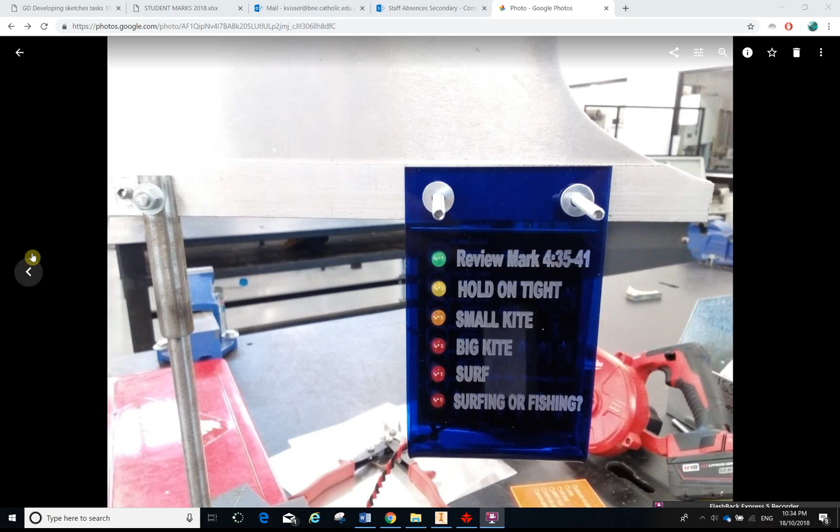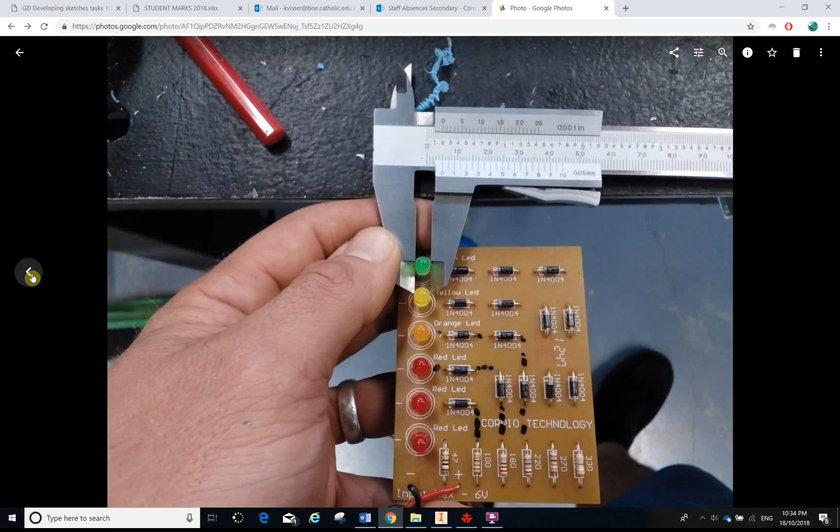So if we look at the pictures, we've got our LED lights coming through our holes that we've positioned on the board. This video will take you through how we figured that out and how to do it in Inventor.

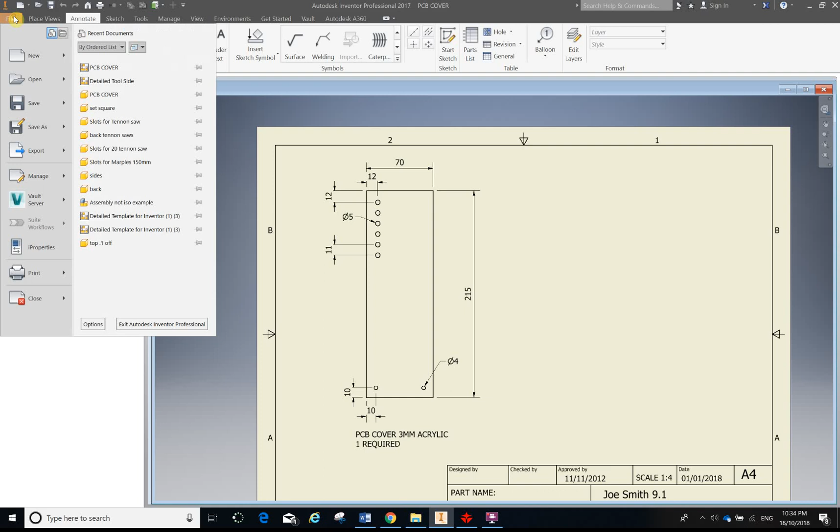So you're going to start off by going into your remote desktop, and you're going to want to open up a new drawing. If I click on File, New, then I definitely know that I'm getting my standard MM.

I've been having a lot of trouble with kids in the past just clicking on New Part, and it's bringing up a not a metric template, so it might be in inches. So that's the way to do it - go File, New. From here I'm going to start a new 2D sketch.

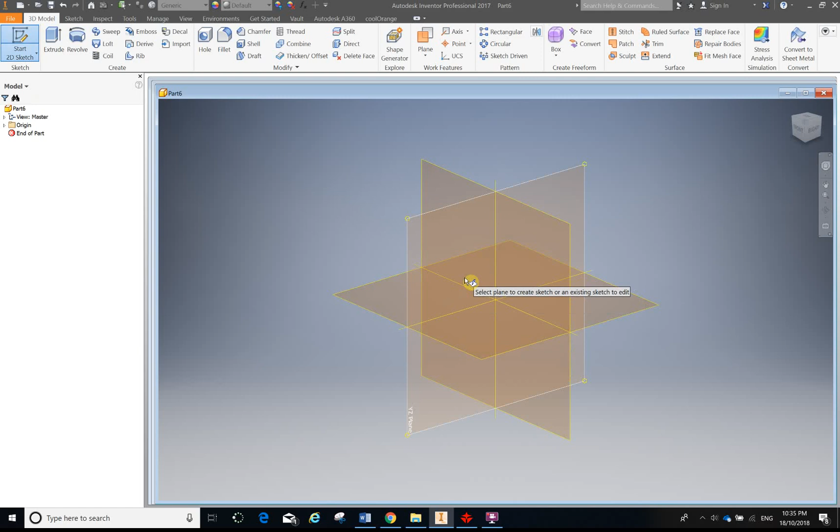I'm going to select any plane, doesn't really matter too much, and we'll start off by drawing the overall size of the piece of acrylic that's going to be cut out.

I'm going to use rectangle, and I'm going to use the little function here that puts it in the center. I've been doing this a bit more often. I'm finding it's a good habit to get into. Probably not going to make much of a difference for this drawing, but it is a good habit to get into for down the track.

Now I've just done this, so I'm pretty confident it's 215 by, I think it was 70. I can change it later, but I'll just go back and I'll have a look at my other drawing.

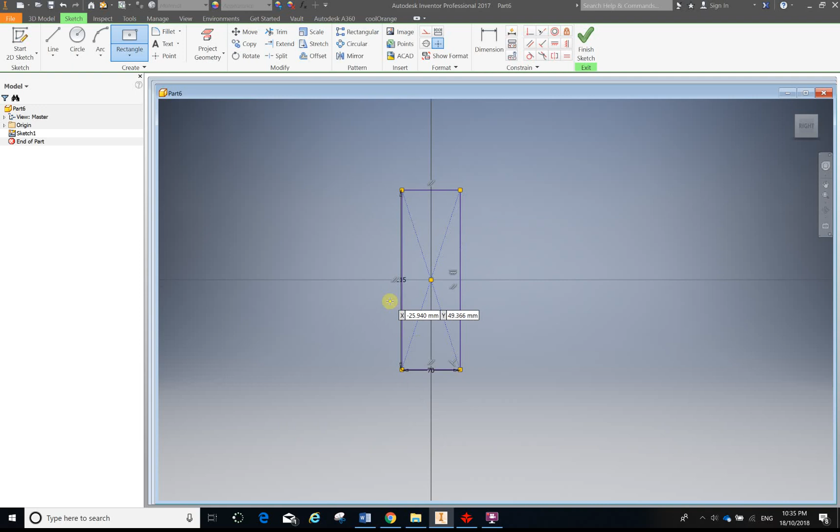So 215 by 70. If I go Control Tab, I can go between the screens that I have open at the moment. So if I go to this drawing here, I've got 70 by 215. Yep, so that's all good. So I'll go back to this drawing that I've got open at the moment, 215 by 70.

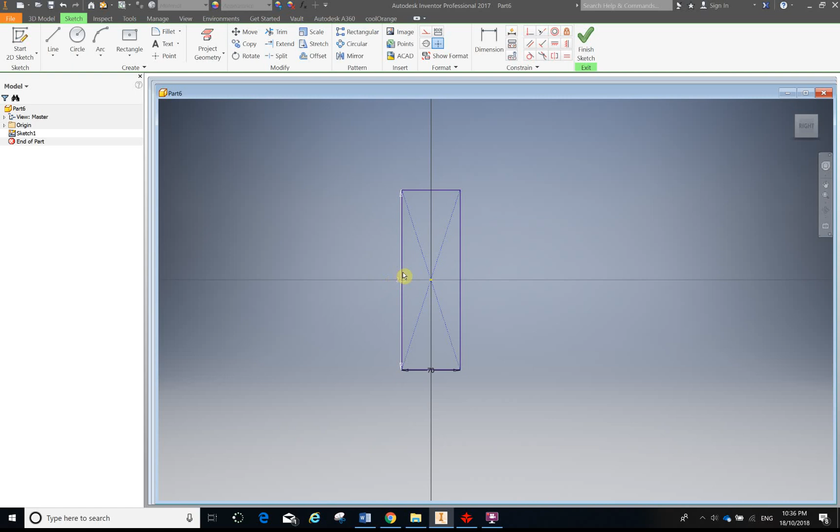I'm going to go Finish Sketch, which has created my rectangle, and I go up to Extrude under the 3D Model tab there. So if you can't see Extrude for whatever reason, you just need to click on 3D Model and click on Extrude. The material we're using is 3mm, so we're going to model the exact material.

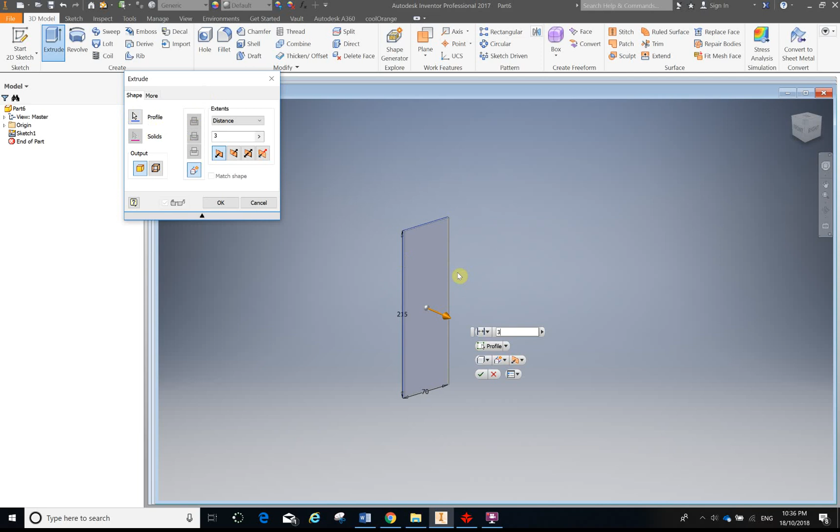So I type in 3mm, and your extrusion function might look like this for the first time if you haven't opened up Inventor before. You're going to click on the downward arrow and select the profile, type in 3mm. So now I've got the full size of the sheet that's going to be required for this PCB holder.

What I need to do is figure out where these holes are going to be for the LEDs to poke through. So I'm just going to select this face, and I'm going to go New Sketch.

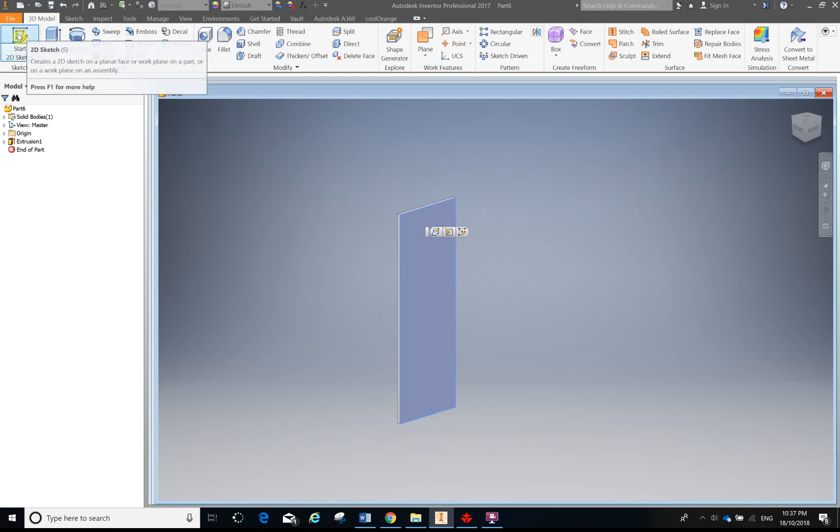So let's create a new sketch there, and let's also create a sketch here - either way it's going to do the same thing. To start off with, I'm just going to draw one of the holes and extrude one of the holes, and then we'll use a pattern technique to transplant them down.

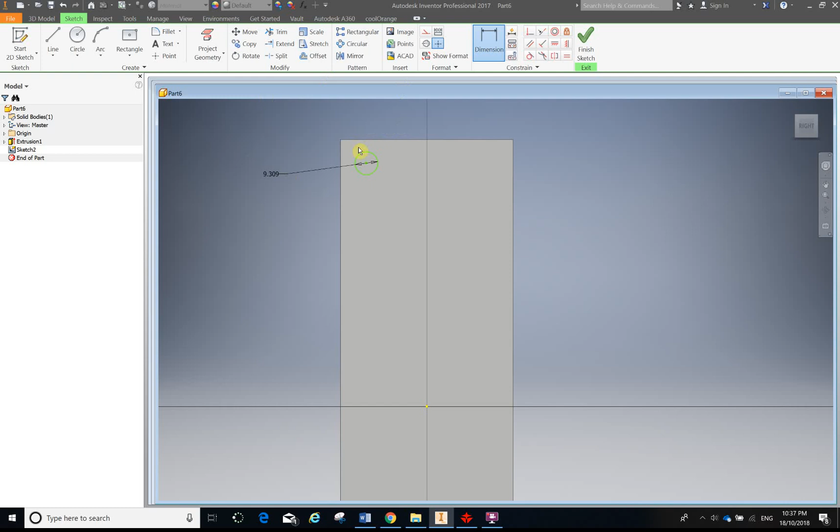So for the moment I'm just going to draw a circle. I'm not sure what size it is, so I'll just click anywhere for now, and I'm going to go Dimension and give this a size. I also want to figure out how far it's going to be from my circle to this top edge.

So I'll give that a dimension as well. At the moment I'm just clicking in these dimensions, and you can see that I've placed this circle in the top corner here. It's not perfect, but I'm going to just check from my original drawing.

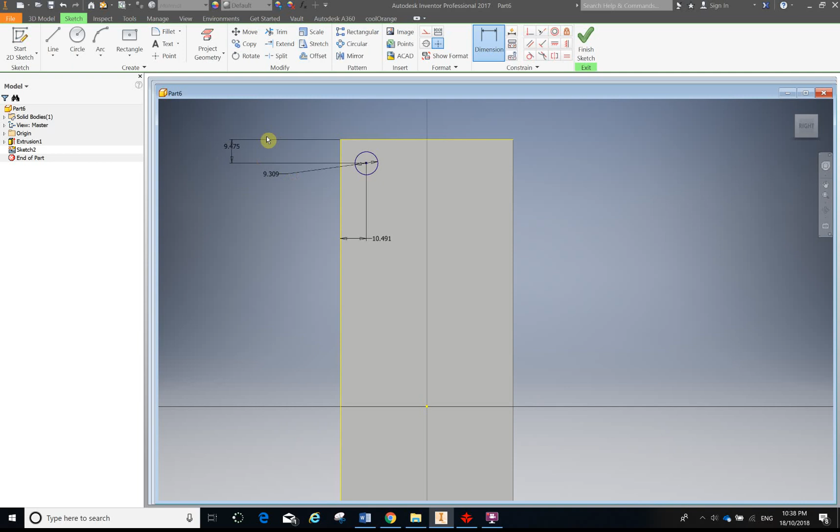And you'll be checking from the sketch that you've done in class, and we'll add the values in. So we'll go Control Tab, and I know that I've got to come 12mm off to the center of the circle, 12mm down for my first one, and it's a 5mm diameter hole.

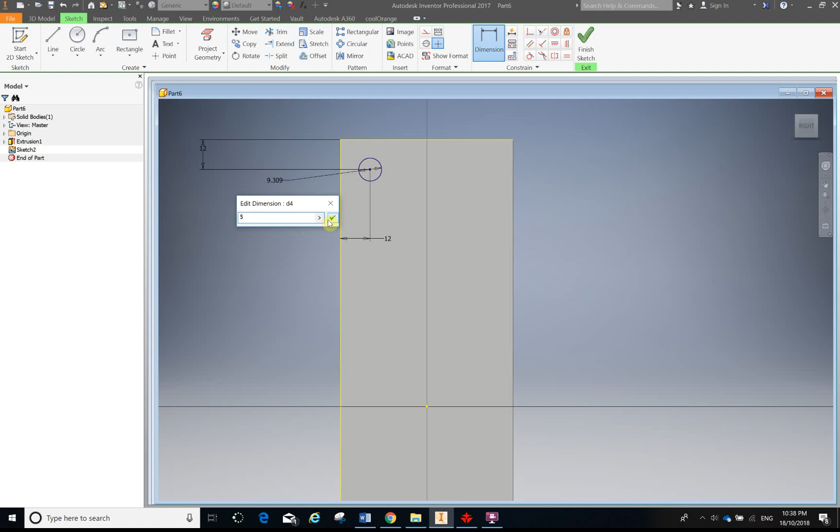So 12, 12 and 5. Let's do that - we've got 12mm down, 12mm across, and a diameter of 5. So if we go back here and take a look at some of these images that I've taken a photo of.

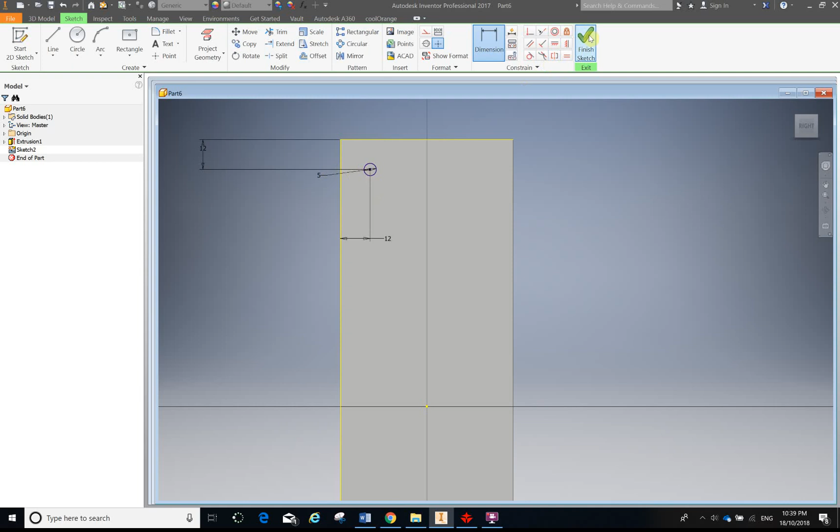And so I'll go back into Inventor now. I've got my 12, 12 and 5, so that's my starting one. I'm going to go finish sketch. The temptation would be to draw the rest of my circles and spend time dimensioning and placing them all around, but there's a much smarter way.

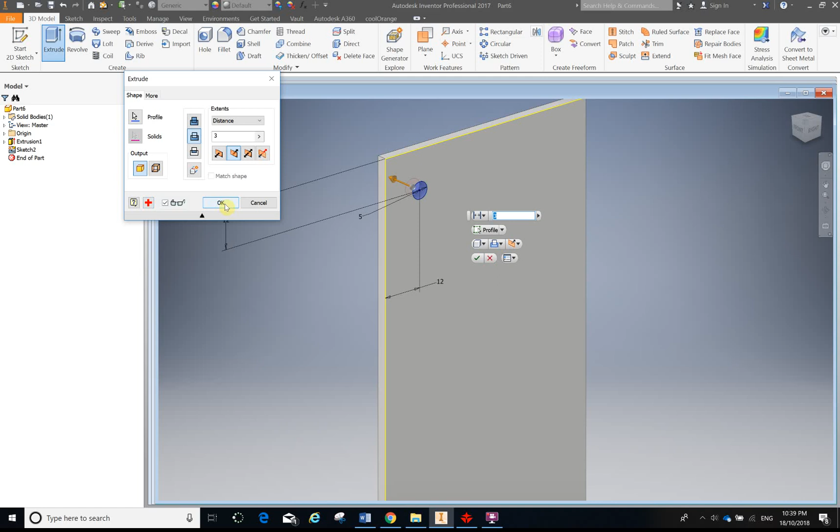So I'm now going to go to extrude. Nothing's come up, so I'm going to select the surface that I want to extrude, and I'm going to go here to subtract, and that will take away the material instead of adding it. So I now have a hole, which is perfect.

Control tab just to get me back into this drawing so I can double check, and yep, so it's 11 mil is what I've used. Like I said, that photo was a bit blurry, and you would have done a sketch in class that you can refer to. So let's go 11 mil, and we need to have 1, 2, 3, 4, 5, 6 holes.

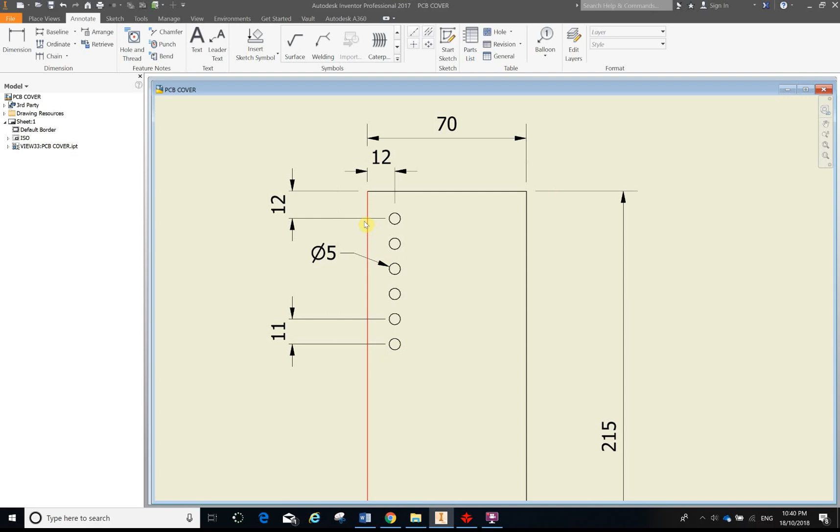So Control tab. What I'm going to do now is use this function up here, the rectangular pattern. So I click on that. The first thing the computer wants to know is what I'd like to pattern, what I'd like to copy.

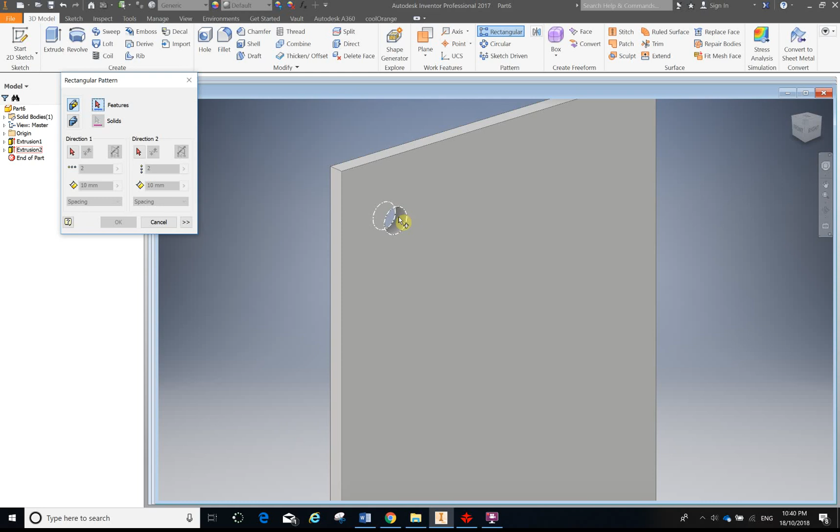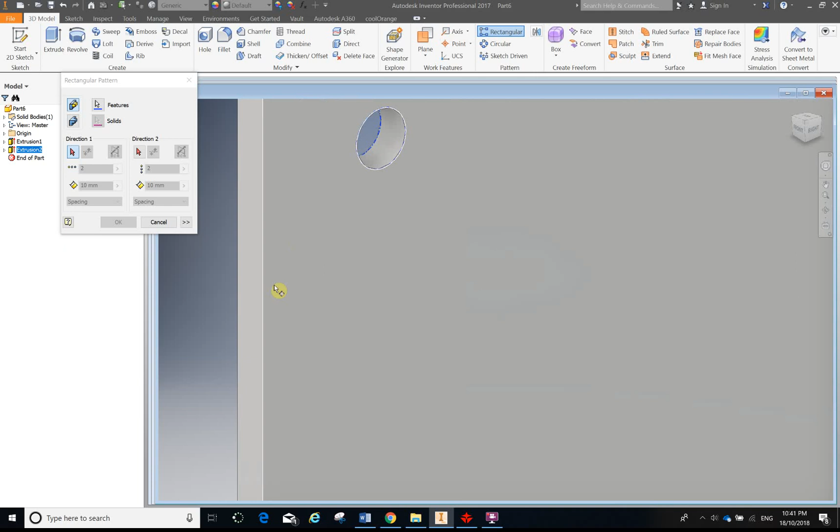I'm going to select the feature that I've done, which is that extrusion. You might have noticed I've scrolled in with my mouse so that I definitely get it. After I've selected the feature, I just work my way down. I go, okay, my direction that I'm going to go. So what it's wanting to know is do you want to go along this edge or down this edge? So I'm going to zoom in and select that edge.

Straight away, it's already placed one there for me. So I know that the spacing needs to be 11, and we said we wanted 6 of them. So 2, 4, 6, that's looking pretty good. I'm now going to click OK.

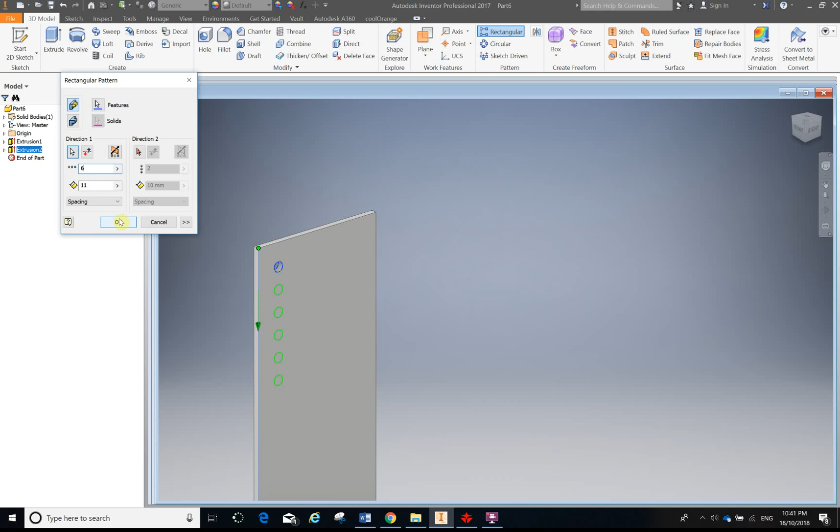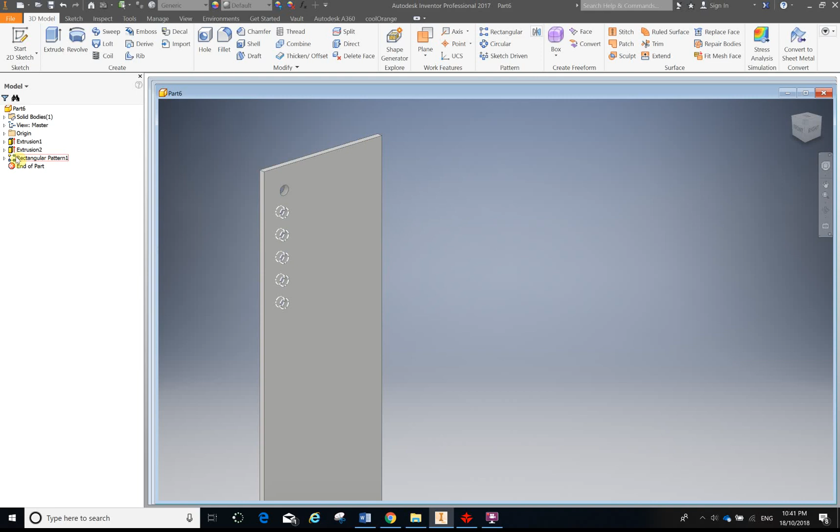It's copied those holes. At any time now, if I was to have printed that out and it's not quite working, or the PCB boards change in the future or whatever and I need to change that size, I can just go to this rectangular pattern, double click on it, and change those values again, click OK, and it just updates it. I find it's a much faster way than trying to draw every hole and then do the extrusion.

So click OK, and I've got that there. If we go Control Tab again now, here's one I've drawn before. Just double check that that's exactly what I did. So yeah, we've got 6 and 11. Yep, awesome. Go back to this drawing.

So far we've got our outline, I've made my holes. I now need to make the 2 mounting holes that screw to the piece of aluminium angle. Different diameter, 4 this time, to suit our bolts that we're using, and they're coming in 10 by 10 on the corners. I could draw one and then pattern it, but because there's only 2, I'm just going to draw the 2 at the same time. So let's see how that looks.

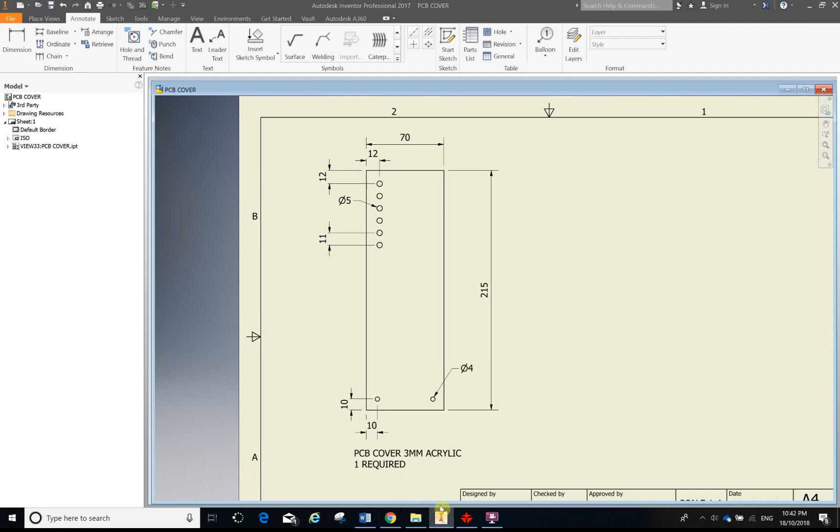Control Tab. This is the one I'm working on. I'm going to select the surface and create a new sketch. Every time we do an extrusion, it needs to be related to a new sketch. I'm going to draw 2 circles. I'm not going to be too worried about exact placement, I can punch it in now.

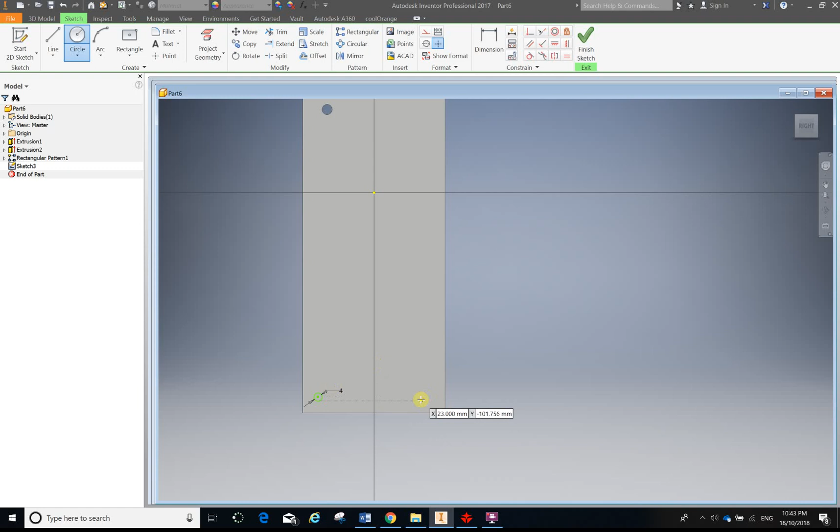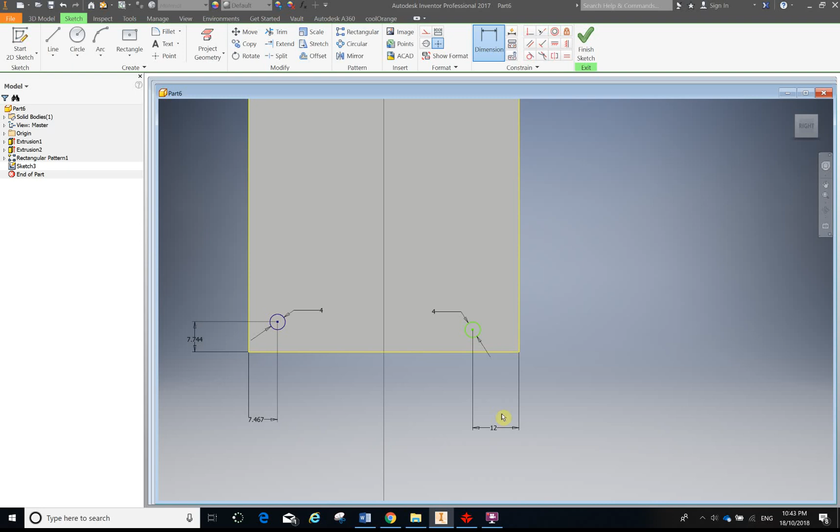I'll go 4, so there's my diameter. I'll go another one here, 4. Now I'm going to go up here to dimension, and it was 10 by 10 that we needed. So click those lines, pull the dimensions across, and then it's just a matter of double clicking, highlighting, typing in 10, pressing enter, double click, 10, enter. Oh, single click, I don't actually have to highlight, that's even better. So I just single click now, type in 10, press enter.

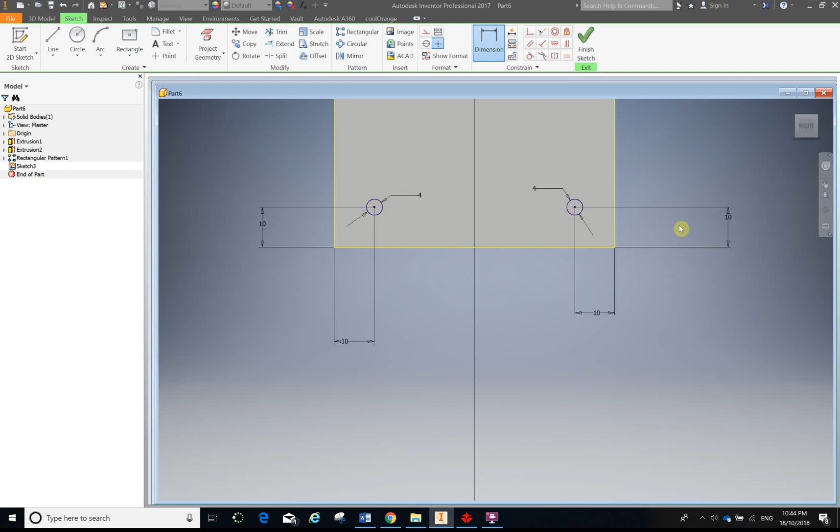So 10 by 10, in from the edge, 4mm diameter, perfect. Finish sketch. I'm now going to go extrude. The computer hasn't recognized what I want to do, sometimes it will, so I just need to select those. It's adding the material on, I want to subtract it, so then I click OK.

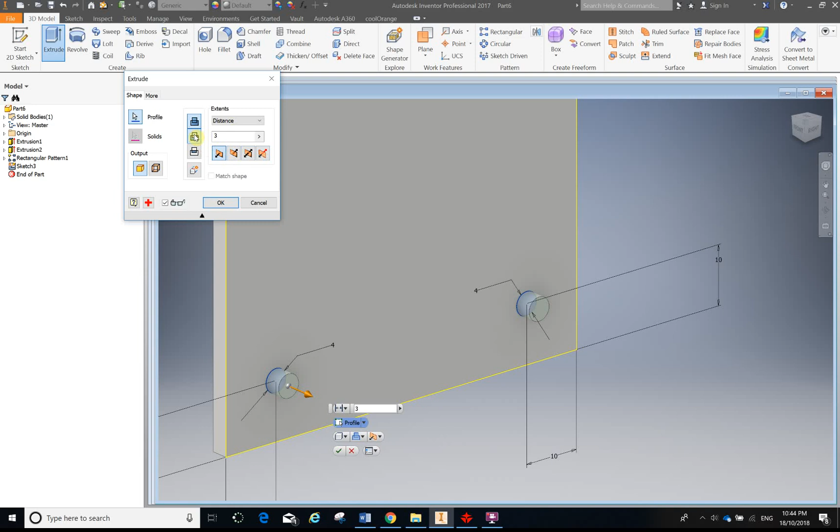Right, so that was pretty simple. I now have my geometry made for this PCB holder. If I select it, go right click, export face as.

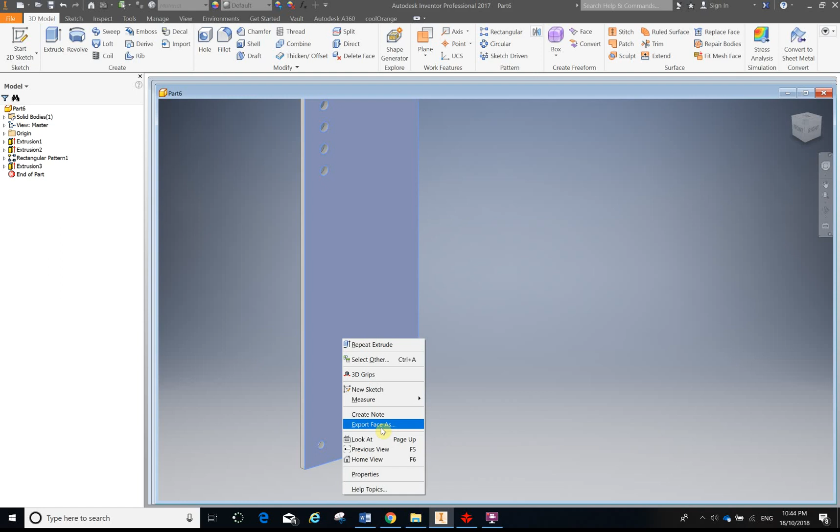So you can see here I've already done one, and I've labelled it PCB cover. You would just label this PCB cover or holder, whatever you want to call it. Make sure it's going to a safe place. If you're in the remote desktop, make sure it's saving under your name, not on the desktop, because it gets wiped after every session, and you would save it.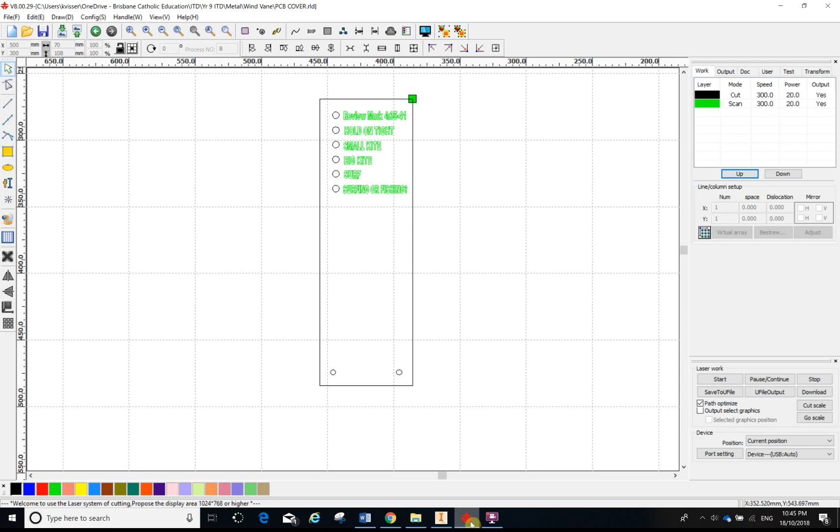The next program you would open up would be RD Works. I've currently got this in here as an example for you. So I would then import my PCB cover. The DXF file is the one that I want.

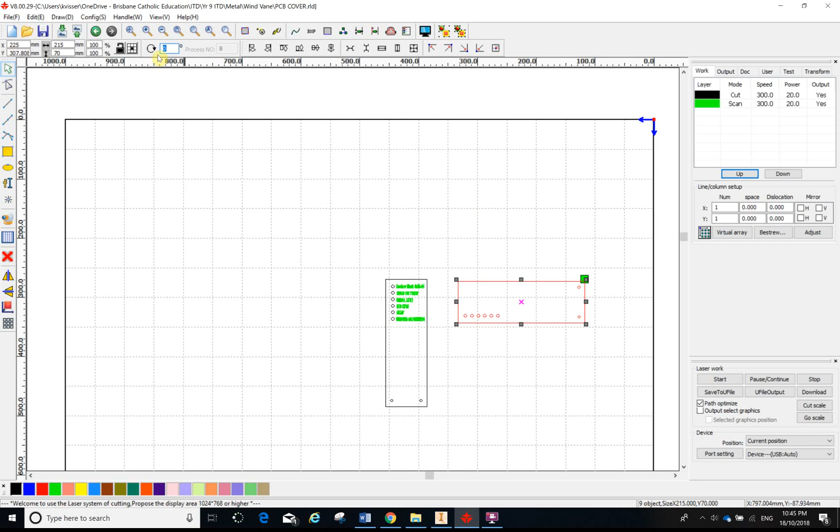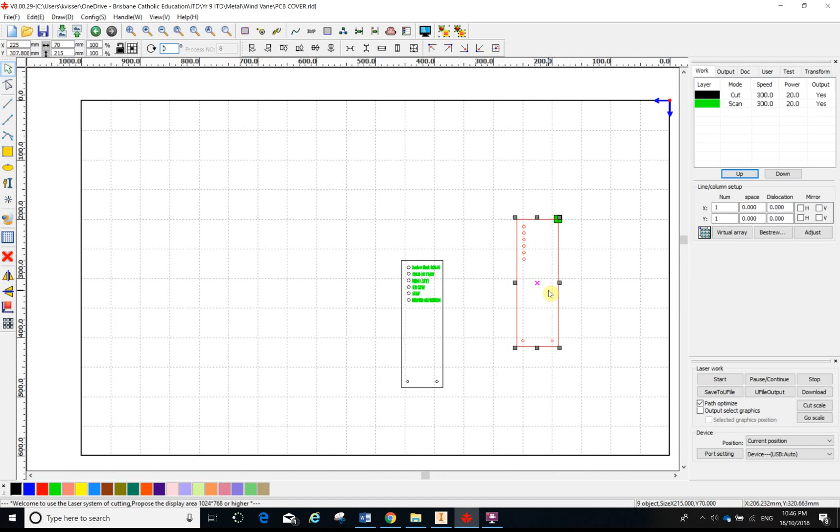In it comes. I don't really like this orientation because it's just a bit trickier to work with text, so I'm going to spin it around, just by using this rotate command and typing in your degrees. It must take it clockwise, so that's why I had to do it so many times. So that's all good, I can place that there.

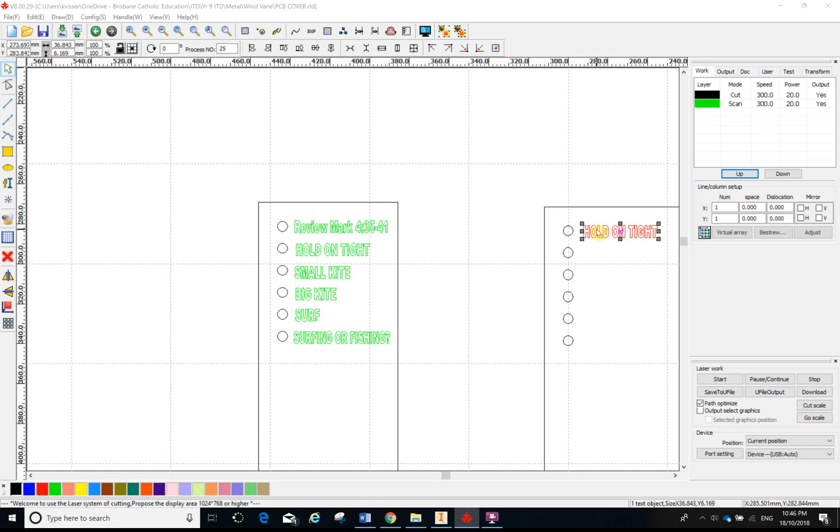I can then go to my text, click that there, and you can see it's got the last one that I put in. There's the text. So the text that I'm using, if I double click on it, it'll tell me a bit about it. I'm using the height of 6mm. You can use whatever font you want.

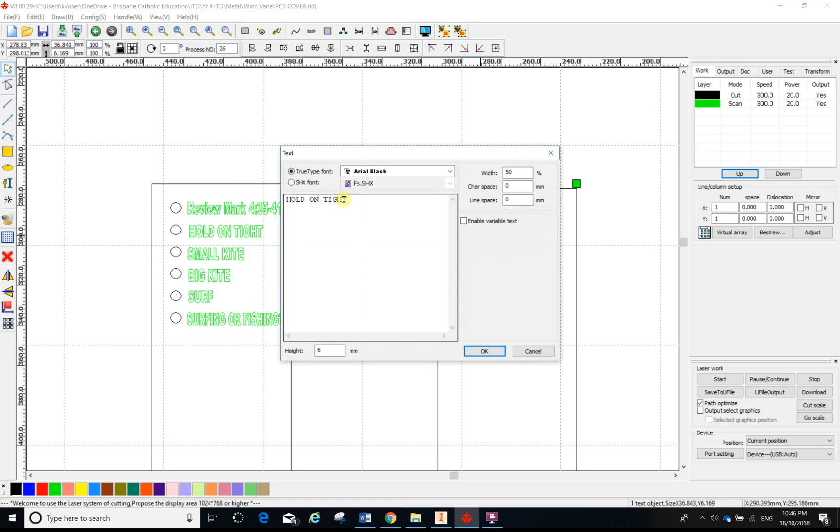What I did, just to make it easier, if I select that and go Control C, I can then click down here and go Control V, and I can just keep placing the text and then double click on it. It just makes it a bit easier for your text height. I can then change it to whatever theme I'm going for on my display.

One thing that's worth doing is just holding down Shift, selecting all these circles, and then coming up and putting this little padlock and locking them in place. What will ensure is that you don't accidentally grab one and move it.

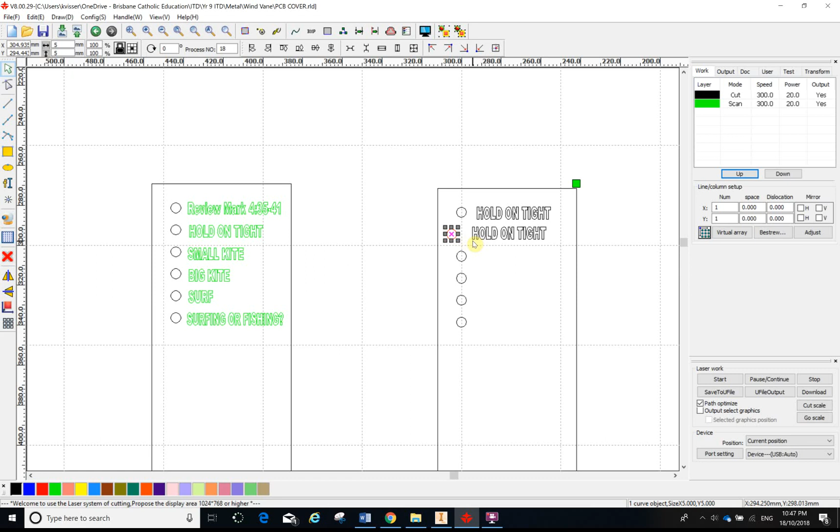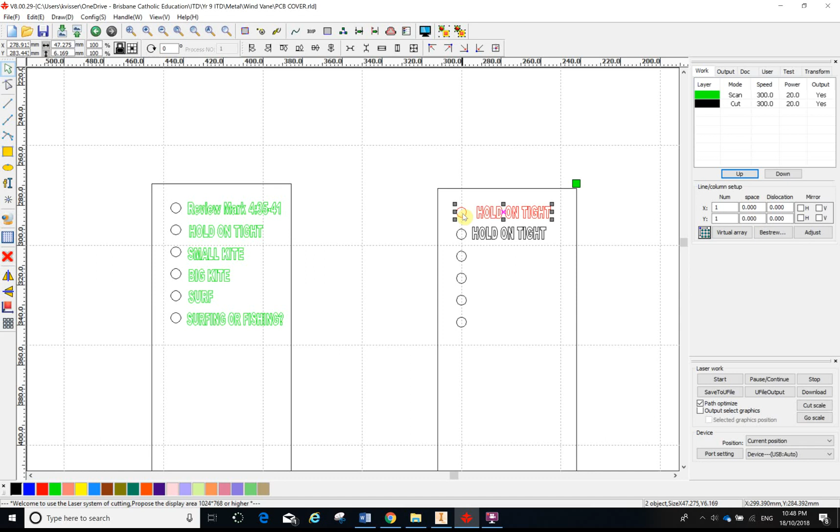Not so much by the physical move, but more by if I was to click on the text, now it's not doing it, that'd be right. If I was to click on the text and then hold Shift, click on that circle, I can come up here and say that I'd like them both to be aligned on the center horizontal there. So what should have happened there is that the circle doesn't move, your text moves to the circle.

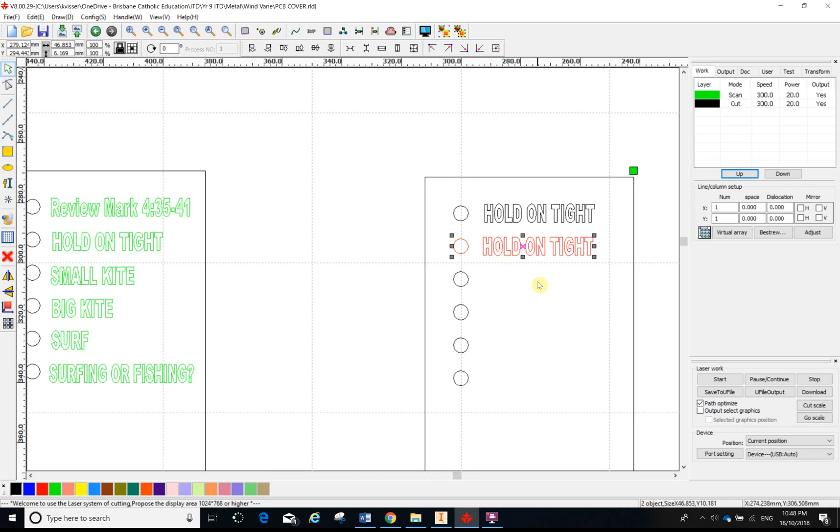So I'll try and make a more obvious one. Because it's been padlocked, I'll select both. Now if I click on this one by rights, it should jump up and the circle should stay where it was. That'd be right, I'll try that again. So if I select that, why is that not locking? Try locking it. It's making a liar out of me. There you go, and up it goes. Didn't work, so what I did, I unlocked it, locked it, and away it goes.

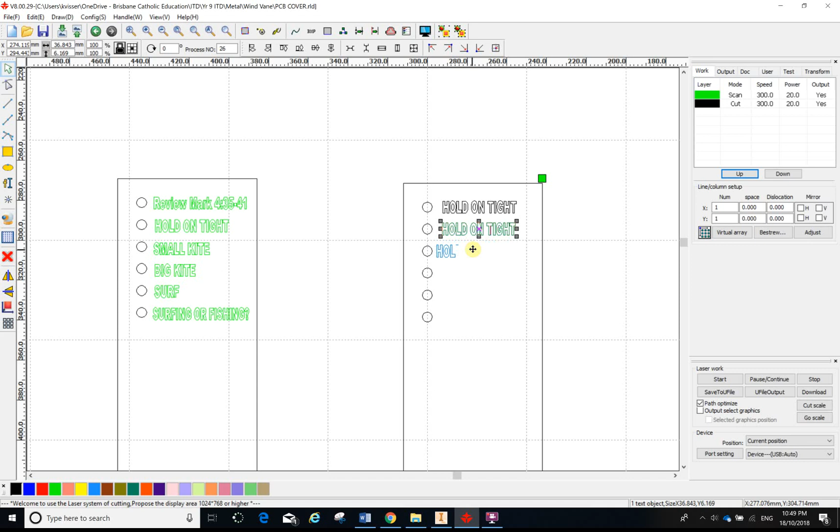So just make sure that when you do it that your circles aren't moving, otherwise they won't line up with the PCB LEDs. So it looks nice when you line it up. You can just try and line it up by eye, but I do like to use these little functions here because it just makes it look a lot more professional, because everything's lining up.

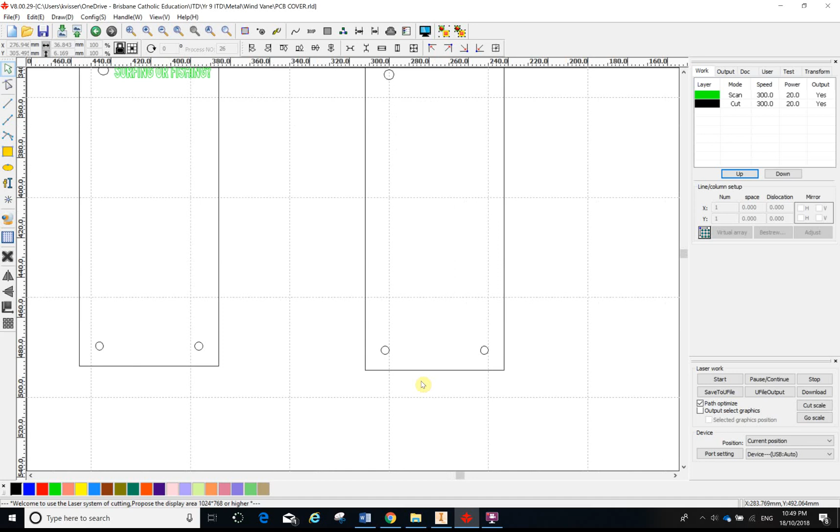And so I won't bore you with the rest of that. As far as the cut values go, if we have a look here, these values that I've put in, well, they must just be a default that it's come up, because that is definitely not the values that we would be using for cutting acrylic on our big laser.

So I'll get you to refer to the poster that's on the wall, and I'll also put a poster up on Teams. Once you're happy with this, save it, and then you would be emailing it to the Unity CNC email address.

Before you email it, double check your settings, because like I said in class, I don't want to flood that computer with files that aren't actually ready to print. So if we open it up and your settings are all over the place, we'll delete the file. You go back to your computer, have another go, make sure it's perfect before you send it over.